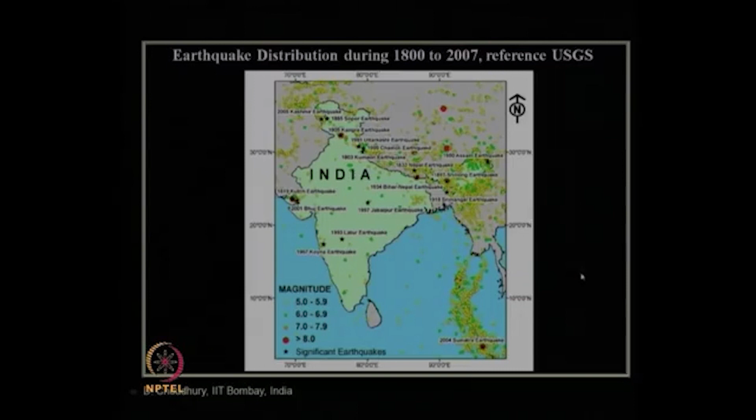As per various seismic zones of India, typical values of PGA, peak ground acceleration, may be taken as per the revised code: 0.1g, 0.2g, 0.25g and 0.4g for zones 2, 3, 4 and 5 respectively.

With this we have come to the end of our module number 1, Introduction to Geotechnical Earthquake Engineering. Next, let us do a recap of module 2, which we learned in the previous lecture. Let us look at the slide here.

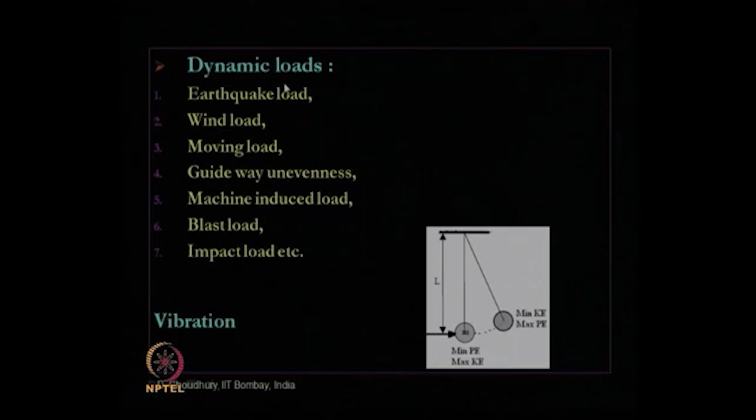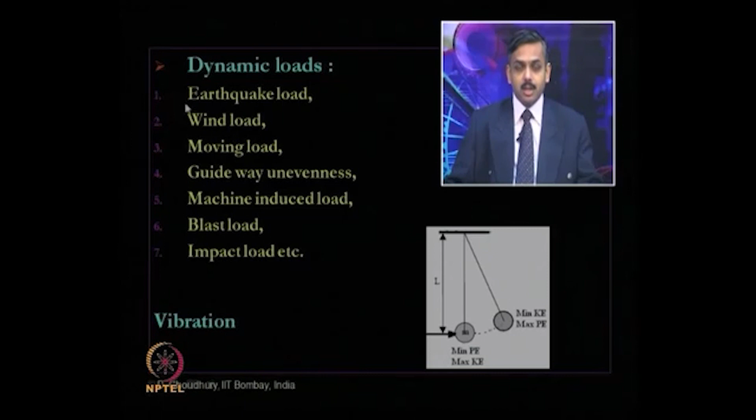What we learned in module 2 is about various types of dynamic loads. A dynamic load has to be time variant, and it should create vibration, that is the exchange of kinetic energy to potential energy and vice versa. These are various types of dynamic loads, and our earthquake load, which we are studying in this course, is one of the major forms of dynamic load.

Then we learned what is known as degrees of freedom. It is nothing but the number of independent coordinates required to define the displaced position of all the masses relative to their original position, which is defined as the degrees of freedom.

We saw the simple example of a simple pendulum, where the degrees of freedom is 1 if it is connected to an inextensible string, but if we change that string to an extensible spring, the degrees of freedom changes to 2. That means we require a minimum of 2 coordinates, theta and r, to define the position of this system at any point of time in space.

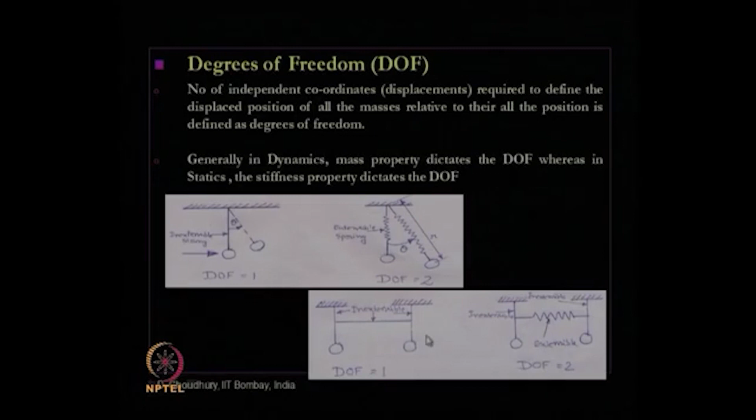Then we saw how we represent a simple vibrating system through a single degree of freedom system. The basic units required to define a simple vibrating system are mass, spring and dashpot or damper, which we call an MSD system. In this MSD system, mass represents kinetic energy, K or spring constant represents potential energy, and the damper or damping constant C represents dissipation or loss of energy.

If there is no loss, we can represent a simple vibrating system using only mass and spring, M and K, but if we want to account for the loss of energy also, it will be M, K and C. This is the picture of a simple vibrating system, a single degree of freedom system, with mass, spring and damper. Its degree of freedom is single, that is u, which at any point of time defines its position, and the applied dynamic load externally on the system is P of t, a function of t.

Taking the free body diagram of this mass, the weight mg acts downwards, and there is a reaction from the rollers on this friction-free surface that balances this static weight. So the static equilibrium of the system is maintained that way.

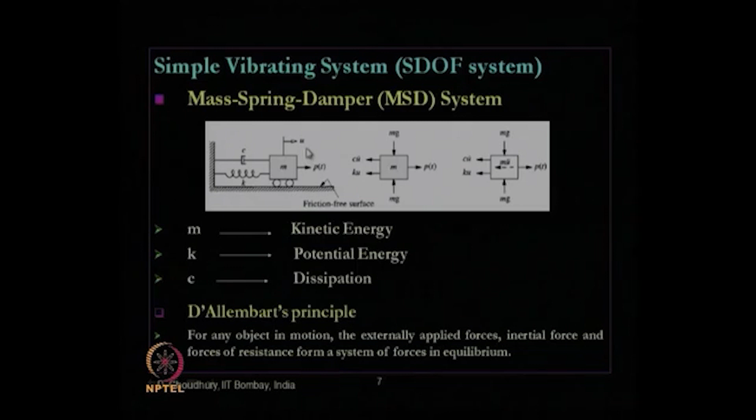Similarly, for the spring force we have to take the relative displacement. Another resistance force comes into picture, mu double dot, which is called the inertia force. That inertia force is nothing but mass times acceleration, where acceleration is d2u by dt squared, the second derivative of displacement with respect to time.

Using that, if we consider a linear model for the equation of motion, mass times acceleration is the inertia force, damping constant times velocity is the damper force, and spring constant times displacement is the spring force, which together equal the externally applied dynamic load P of t.

This is called a linear model because mass is assumed constant, not changing with time; damping constant remains constant; and spring constant is also constant. This is for linear spring, linear damper, and constant mass system. This is the governing equation of motion for a linear model, written in another notation as mu double dot plus cu dot plus ku equals P of t.

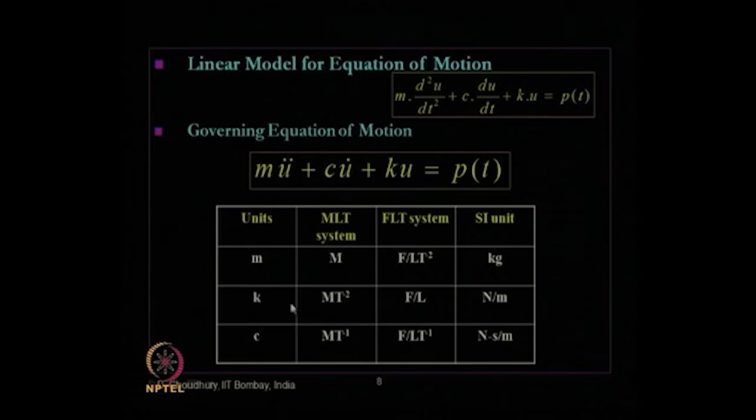These are the various units commonly used for m, k and c. Mostly in SI units we use kg for mass, Newton per meter for spring constant, and Newton second per meter for damping constant.

In our previous lecture we had seen the various types of vibrations. We classified vibration into two major categories: free and forced vibration. Free vibration is when there is no externally applied dynamic load acting on the system, that is P of t is 0, but forced vibration is when that is non-zero.

Within free vibration we had two categories: undamped free vibration and damped free vibration. Undamped means the damping constant is 0, so there is no loss of energy, and damped means the damping constant is non-zero, so there is loss of energy. Similarly, forced vibration can be undamped or damped depending on whether C is 0 or non-zero. Another subclassification of forced vibration is aperiodic and periodic.

Periodic means the applied dynamic load repeats with time, whereas aperiodic means it does not repeat with time. An example of periodic loading is harmonic loading, any sinusoidal or cosinusoidal loading, which can be considered periodic forced vibration.

When the load is not repeating with time, that is aperiodic, we can have two sub-classifications: transient aperiodic forced vibration and steady state aperiodic forced vibration. Transient means the externally applied dynamic load acts only for a finite duration.

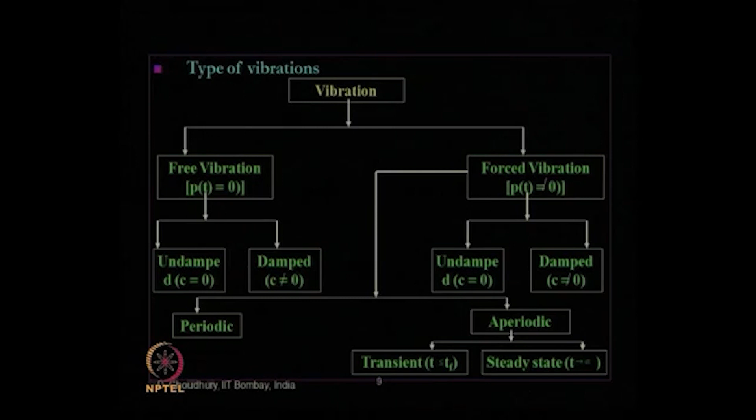Then we have seen the solution for the simplest case of free vibration with undamped condition, where the equation of motion boils down to mu double dot plus ku equals 0. We should know the initial conditions, that is at time t equals 0, what is the displacement and what is the velocity, to get the complete solution for this free vibration.

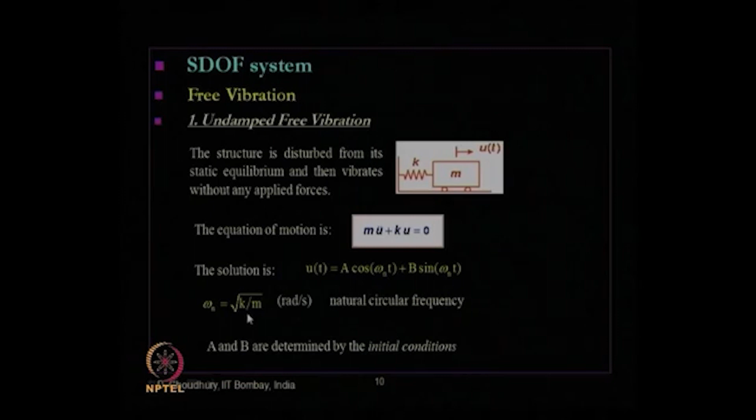The solution of this equation takes a certain form, where the constants a and b need to be obtained from the known initial conditions, and at least one of them must be non-zero. This omega n is called the natural circular frequency, represented by root over k by m.

Then we have seen how to model the earthquake excitation as a forced vibration. This is the basic model, where inertia force, damper force and spring force equals zero, where inertia force acts on the total displacement, because the acceleration acts on this mass for the total displacement, but damper and spring force acts for the relative displacement compared to this ground and total displacement. The difference between that will give us the relative displacement.

By simplification we got the basic equation of motion for earthquake excitation like this: m u double dot plus c u dot plus k u equals minus m ug double dot of t. So ug double dot is nothing but the ground acceleration due to earthquake, and that force gives us the dynamic force due to earthquake, whereas u is nothing but the relative displacement between ground and the top level where mass is concentrated.

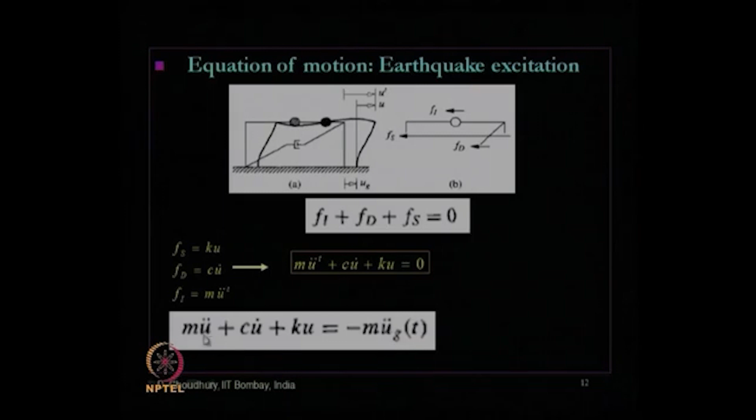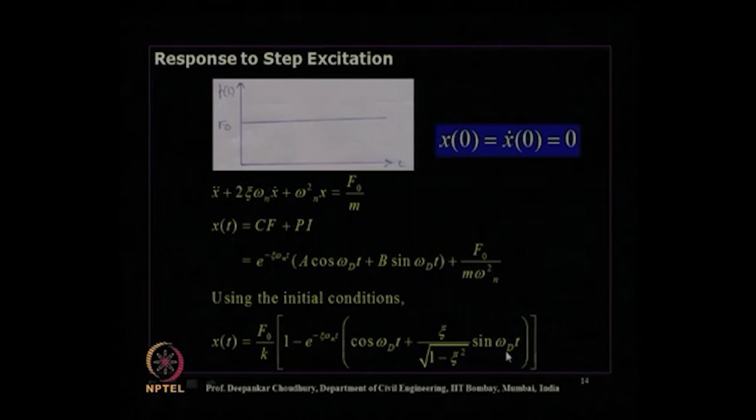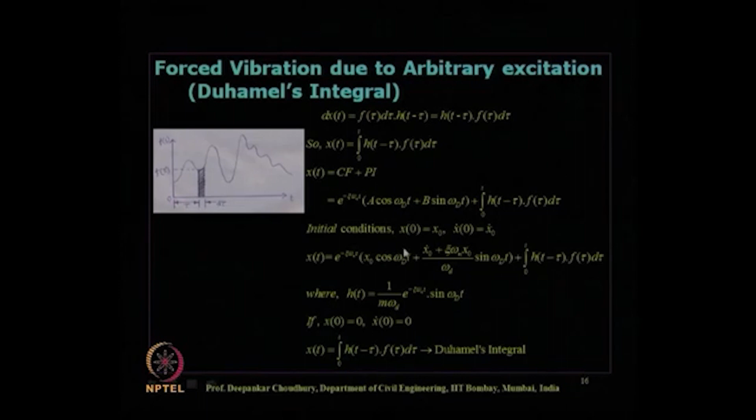Then we had also seen the forced vibration response to step excitation like this, and the complete solution of that equation we have discussed in our previous lecture. Then for any arbitrary excitation, such as any random motion like earthquake motion, we can take a small infinitesimal portion and use Duhamel's integral to find out the particular integral part, while the complementary function part can be obtained by putting x equals to 0 in this basic equation.

So we can now do a simple example problem on this topic of basics of vibration. Let us look at the problem over here.

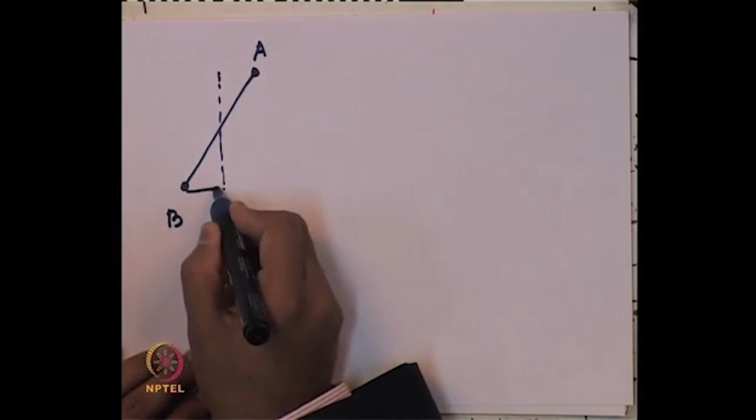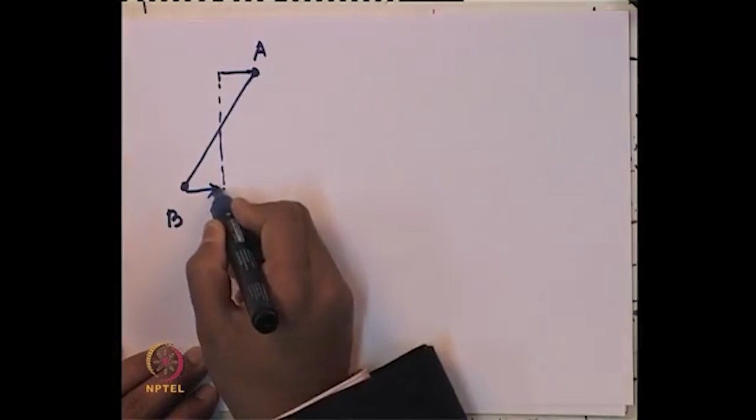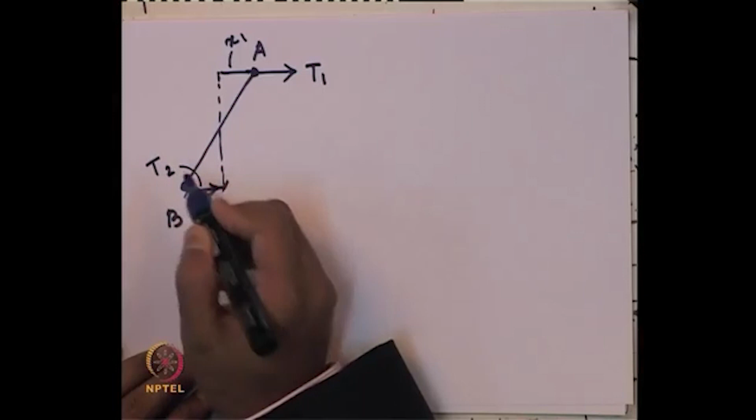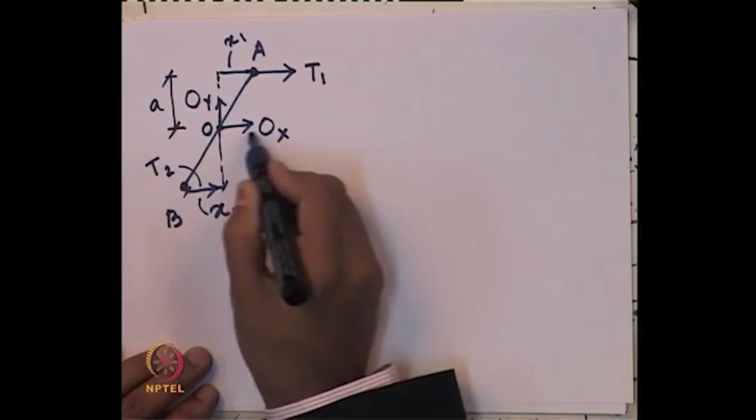So let us see what will be the solution if we draw the free body diagram of this link. The link which is shown over here, link AB, we are drawing the free body diagram. This is moving by x2, this is moving by x1. So this distance is x2, this distance is x1, and corresponding forces are, let us say this is T1, let us say this is T2. We have hinge over here at O, where we can have reactions in the hinge OX and OY in these two directions, and these dimensions are given as A and this distance is given as B.

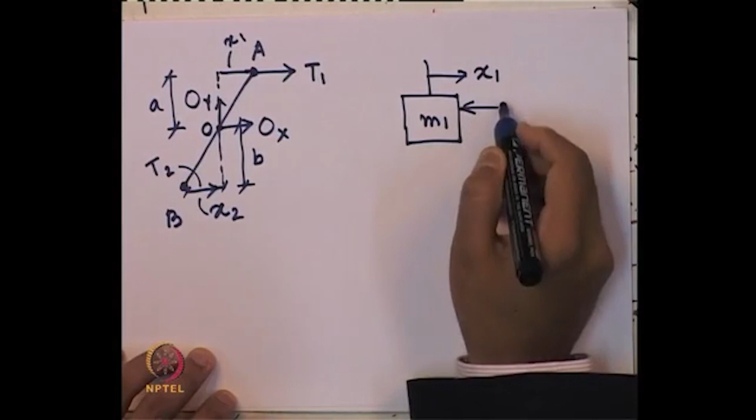So if we draw the free body diagram of the masses, how will it look like? For M1 we have x1, so force will be K1 x1. Let me draw the damper force also for completeness, C1 x1 dot, and we have this inertia force M1 x1 double dot, and the force in this link is T1. This T1 balances through that link. So this is the free body diagram of M1. This is the free body diagram of link AB.

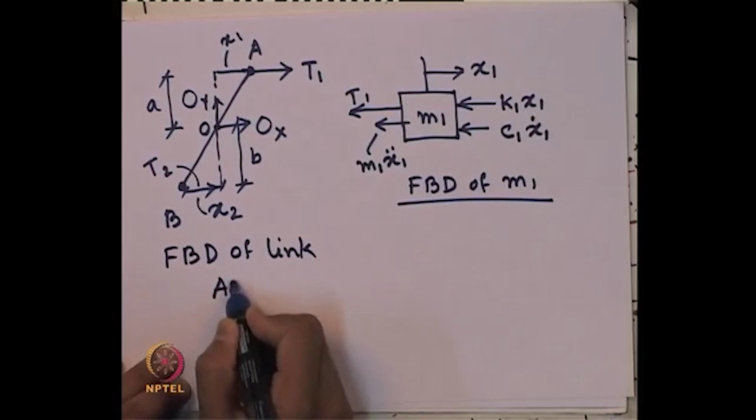And for mass M2 we will have K2 x2, C2 x2 dot, this is the direction of x2, this one is T2. So this direction T2 and this direction T2 balances through that link, and this one is M2 x2 double dot, the inertia force. So this is the free body diagram of M2.

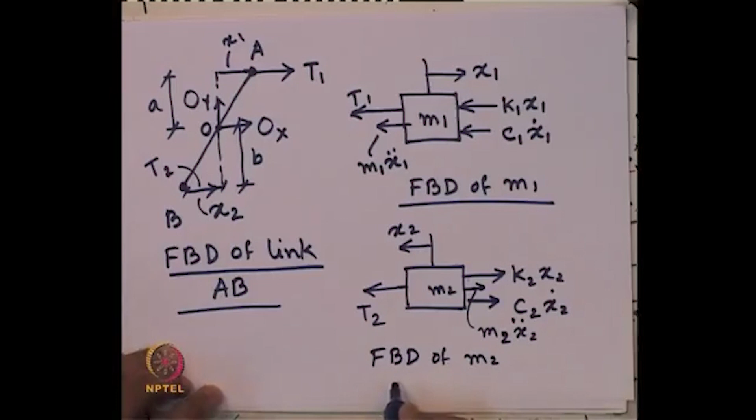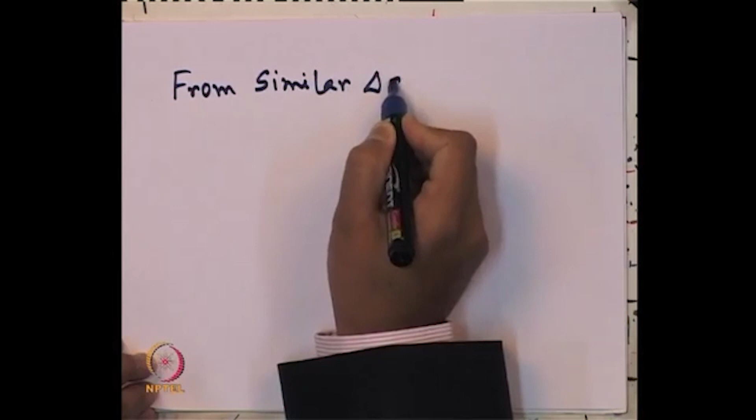Now considering these similar triangles, from the free body diagram of link AB, what can we write? From similar triangles, we can write x1 by A equals x2 by B. Let us say this is equation number 1. We can have a look over here.

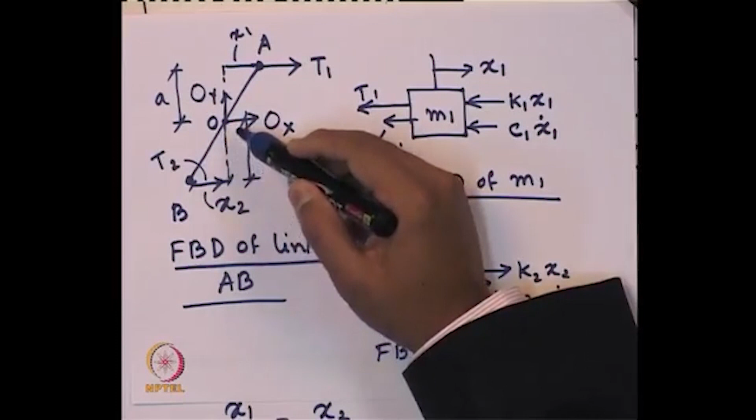See, this is A, this is our x1. So, x1 by A equals to x2 by B. So, that is what is shown over here.

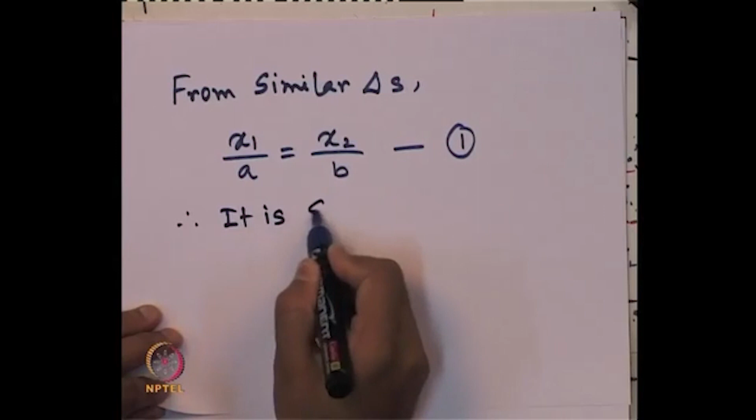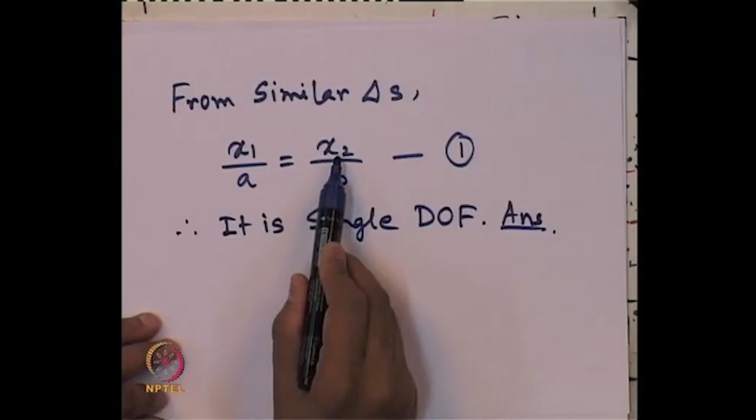Therefore, what we can say about degrees of freedom? It is single degree of freedom. This is the answer of the first part of the question. Why? Because x1 and x2 are not independent, they are dependent on each other. That means the entire system, x1 and x2, are correlated. So, the number of independent coordinates is either of them. Hence, the entire system is having a single degree of freedom system. So, that is the answer of the first part.

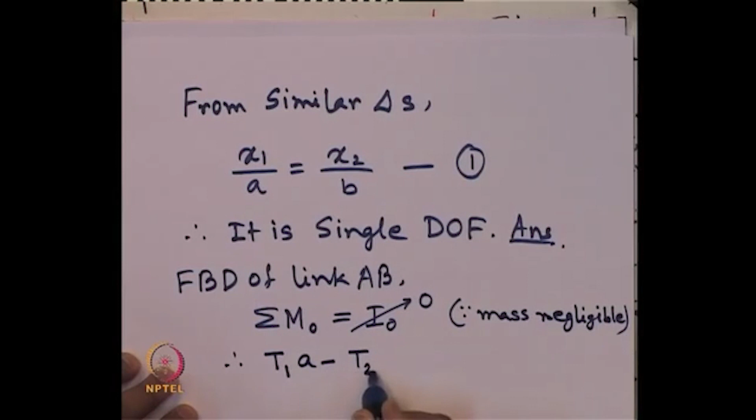Now, from FBD of link AB, we can get, if we take sum of moment about that hinge point, equals to I naught, which is 0 because mass of that link is negligible. Otherwise, some inertia component will come. Therefore, we can write T1 times A minus T2 times B equals to 0. So, this is our second equation.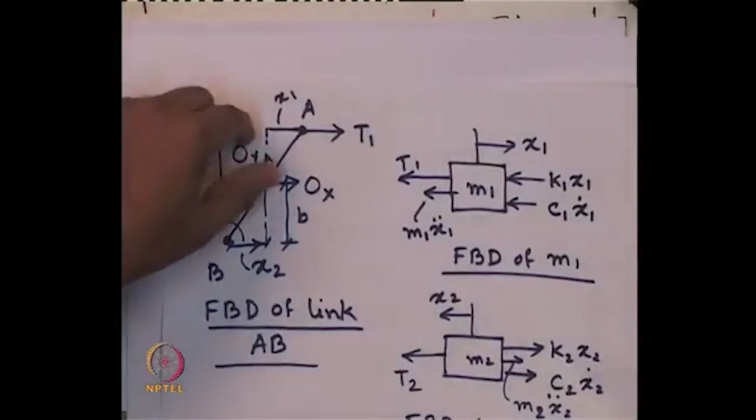If we look at here, we are taking moment about this point. So, T1 times A plus T2 times B, T1 times A minus T2 times B equals to 0. So, with that, now from the free body diagram of...

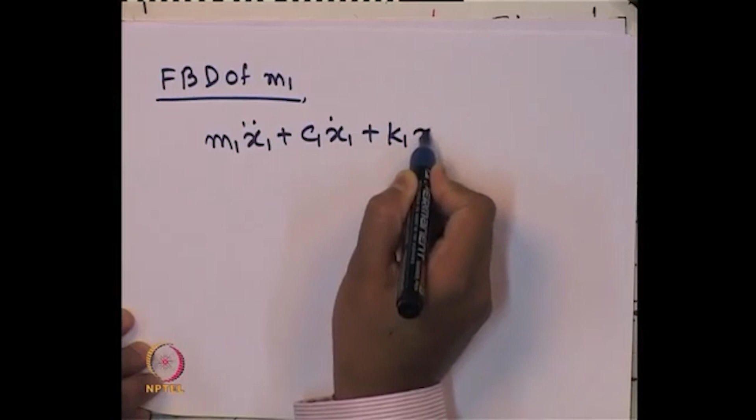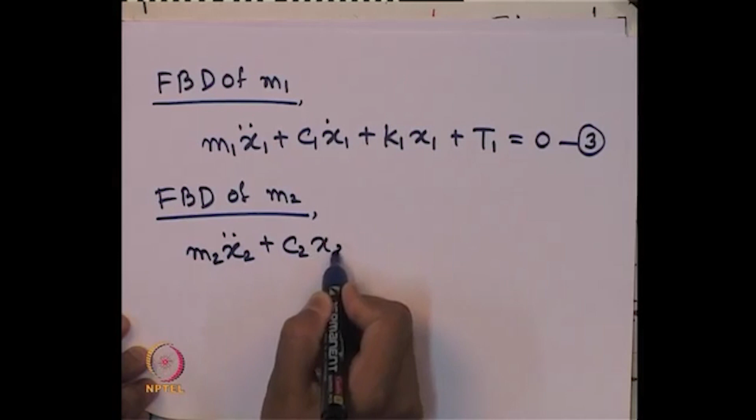So now using FBD of M1, what we can write? That M1 x1 double dot plus C1 x1 dot plus K1 x1 plus T1 equals to 0. This is say equation 3, and from FBD of mass M2, we can write M2 x2 double dot plus C2 x2 dot plus K2 x2 minus T2 equals to 0. This is equation 4.

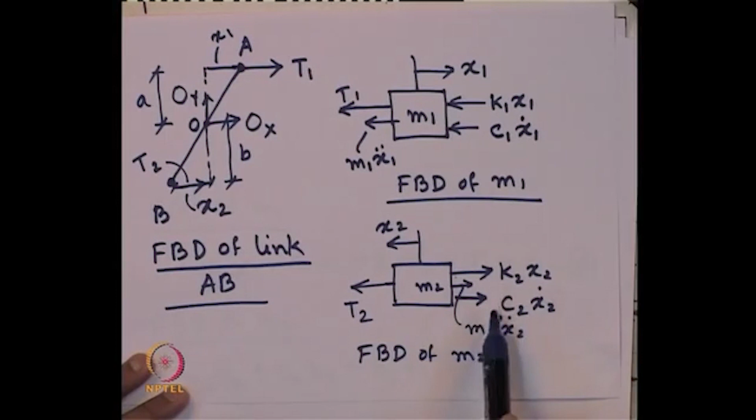Let us look here. So, M1 x1 double dot plus C1 x1 dot plus K1 x1 plus T1 equals to 0, and here M2 x2 double dot plus C2 x2 dot plus K2 x2 minus T2 equals to 0. That is what we had written through these equations.

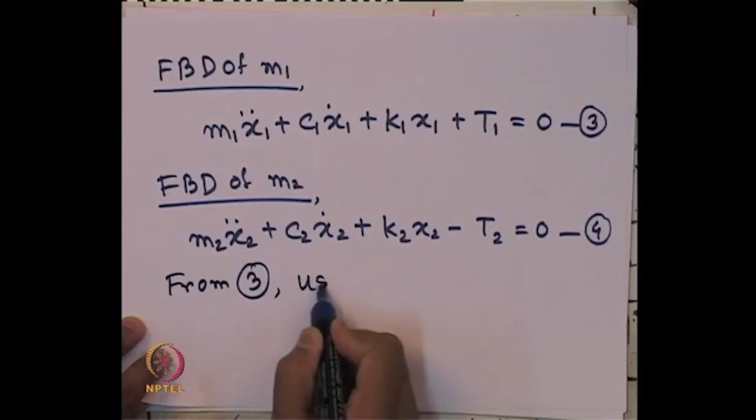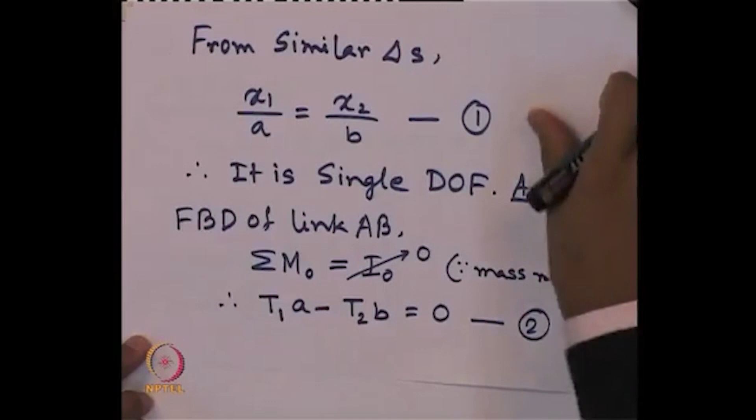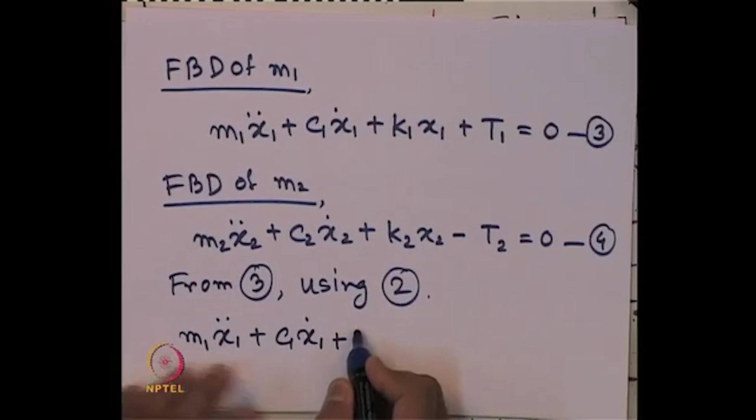Now, from this equation 3, using our equation 2, that means the relationship between T1A and T2B, what we can write? That M1 x1 double dot plus C1 x1 dot plus K1 x1 plus T2 times B by A equals to 0. That can be equation 5. Why? Because this T1 is nothing but T2B by A. So, that is what I have written, T1 as T2B by A.

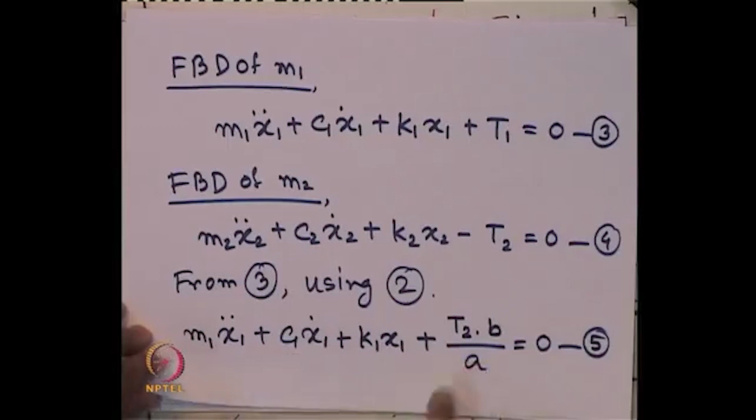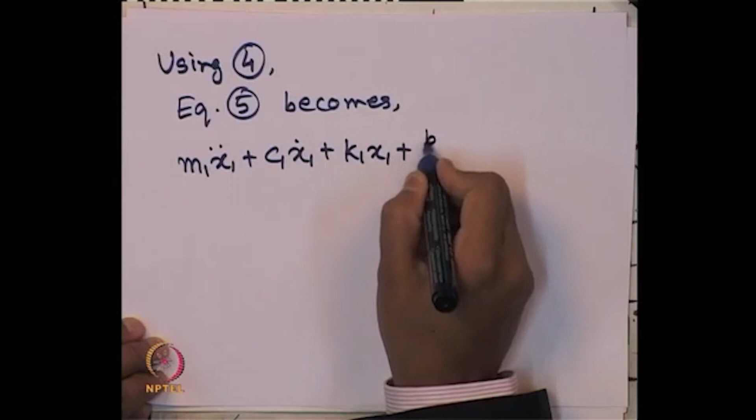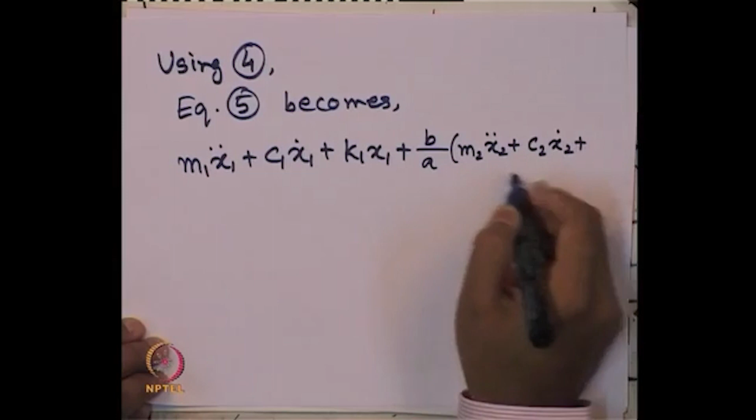So, using now equation 4 and 5, solving these two equations, what we can write? Using 4, equation 5 becomes M1 x1 double dot plus C1 x1 dot plus K1 x1 plus B by A times M2 x2 double dot plus C2 x2 dot plus K2 x2, this equals to 0.

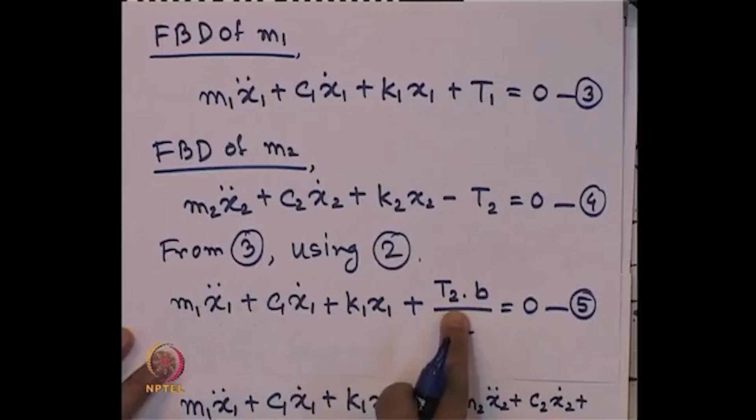How did we get this? Look at here. So, this equation 4, that T2 equals to this, that we are putting in equation 5. So, that is why we got this B by A times T2, which is this part. Hence, it becomes like this.

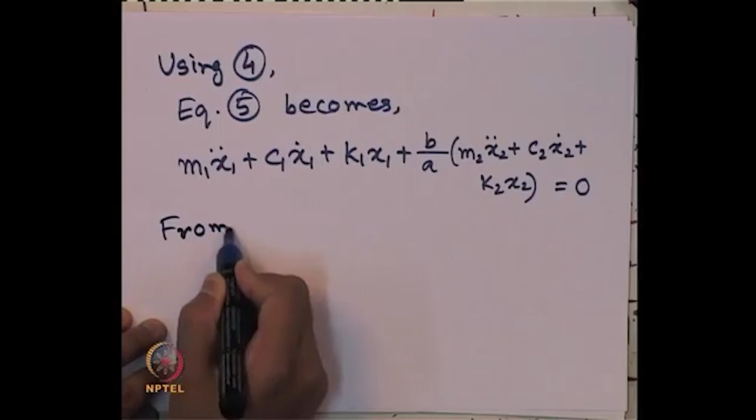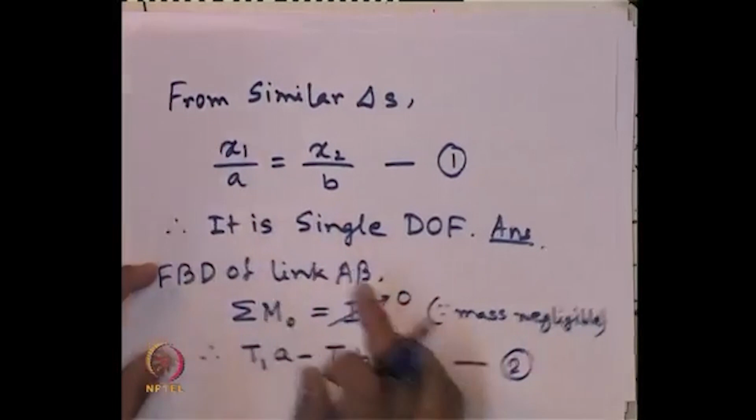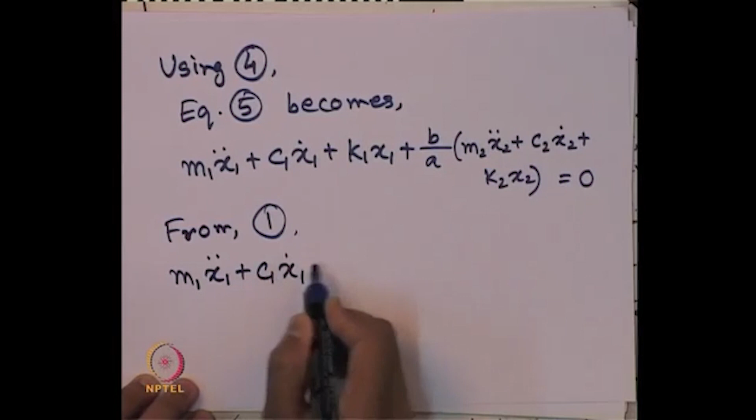Now, from equation 1, let us use what we can get from 1. From 1, we have a relationship between x1 and x2 through this A and B. So, if we use that, what we can write: m1 x1 double dot plus c1 x1 dot plus k1 x1 plus b by a into another b by a, m2 x1 double dot plus c2 x1 dot plus k2 x1...

This will be x1, because we have now used equation 1. So, k2 x1 equals to 0. So, we have to be taking equation 1. Why? Let us go back again to equation 1. This x2 is nothing but b by a times x1, that is what I am using here. X2 equals to b by a times x1, that is why b by a, another b by a came out, and this becomes x1.

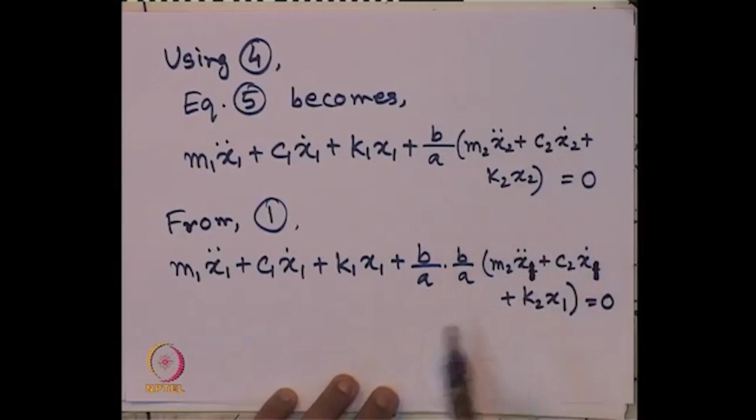Hence, on simplification, we can write this equation as m1 plus b square by a square times m2, times x1 double dot, plus c1 plus b square by a square times c2, times x1 dot, plus k1 plus b square by a square times k2, times x1, equals to 0. So, let us say this is equation 6. So, you can see everything is represented in terms of a single degree of freedom, which is x1 we have taken in this case.

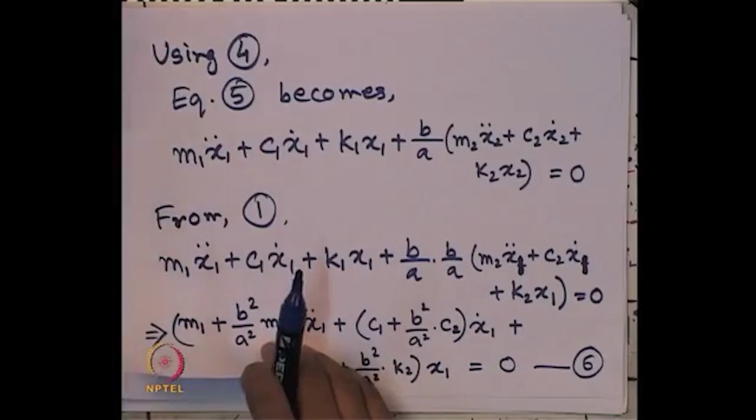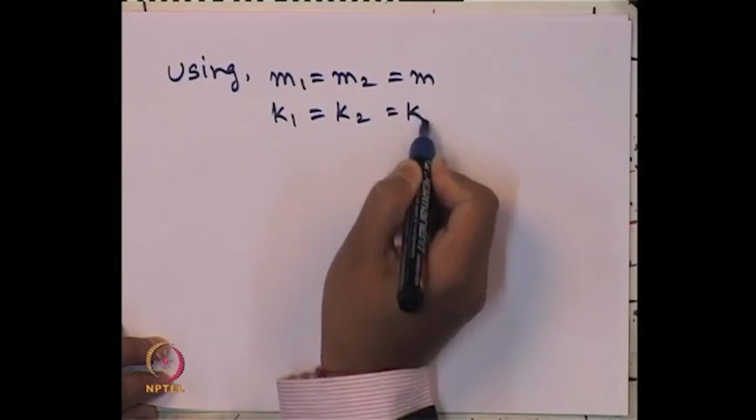So, now what can we write further? Now, what is the given condition? Using m1 equals to m2 equals to m, that is what is given to us, k1 equals to k2 equals to k, and c1 equals to c2 equals to c.

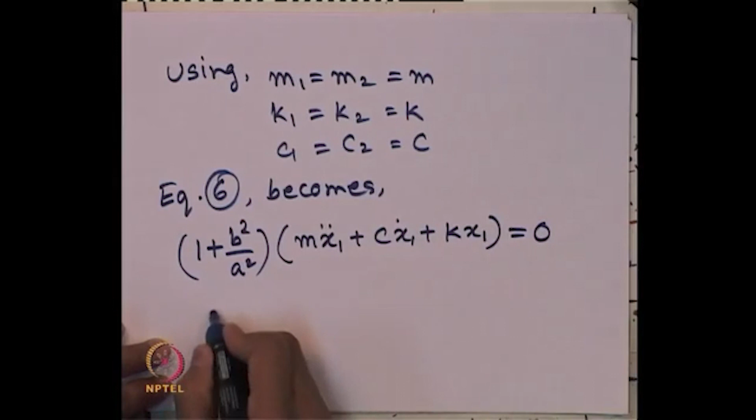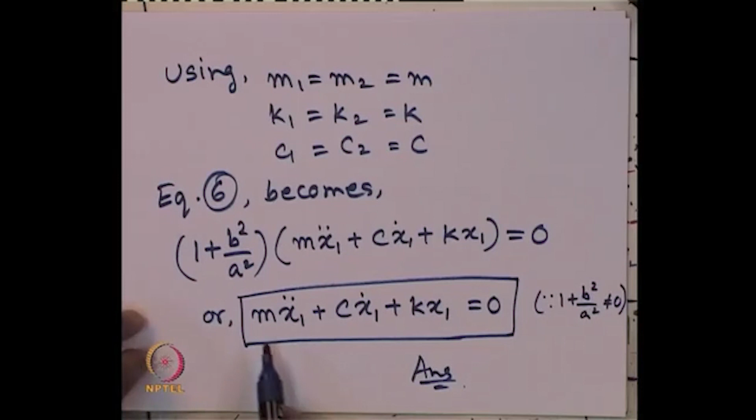Using this, equation 6 becomes: 1 plus b square by a square, we can take common, that becomes m x1 double dot plus c x1 dot plus k x1 equals to 0. So this is our governing equation of motion, that is the second part of the answer, because this 1 plus b square by a square term is never 0.

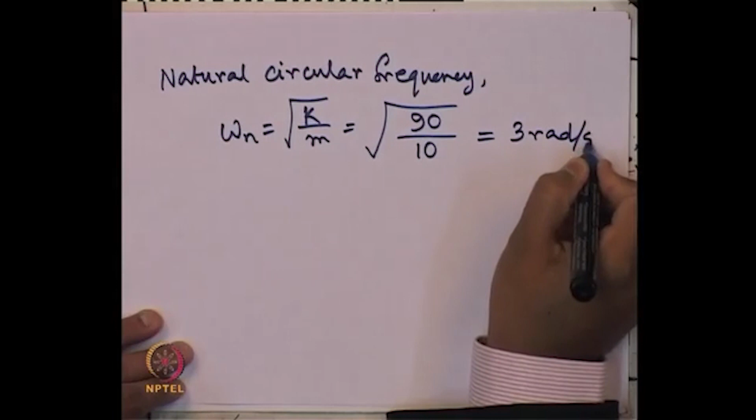Now let us calculate the values whatever has been asked in this question. We have to find out natural circular frequency, which is omega n, nothing but root over k by m. What are the values of k given? That is 90, m is 10 kg, which comes out to be 3 radian per second. That is the another answer.

What is asked? Calculate the natural frequency. And what is natural period? So natural period is T n, which is 2 pi by omega n, which will be, after putting this value of omega n here, about 2.1 second. So this is the answer of another part.

Let us look here what was asked in the question. Calculate the natural frequency. Natural circular frequency is 3 radian per second, and natural period of vibration is 2.1 seconds. So if somebody is interested to calculate, they can calculate f n in terms of hertz also, that will be 1 by 2.1. So therefore f n, natural frequency, will be equals to 1 by T n, that is 0.478 hertz.

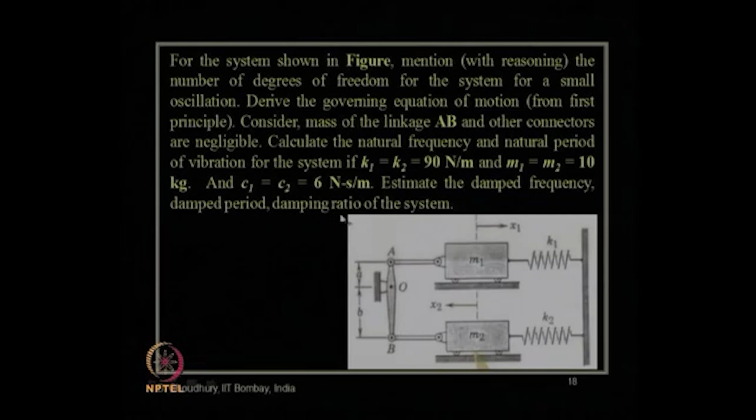Next, it is asked, let us see here what is asked. Estimate the damped frequency, damped period and damping ratio. So to find out these things, we need to compute first critical damping. Critical damping C c is nothing but 2 m omega n, which is 2 into m is 10 kg, omega n we obtained 3 radian per second. So, so much Newton second per meter unit, so 60 Newton second per meter.

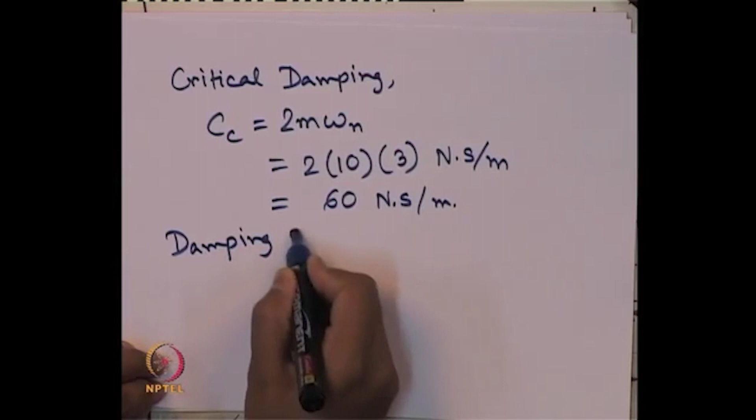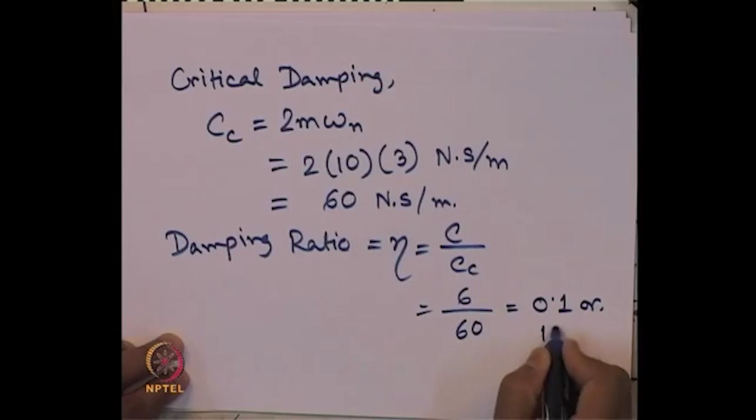So damping ratio is nothing but eta, let us say C by C c. How much is C given? 6, and how much C c we computed? 60. So it comes out to be 0.1, or if we represent in percent, it is 10%, damping ratio is 10%.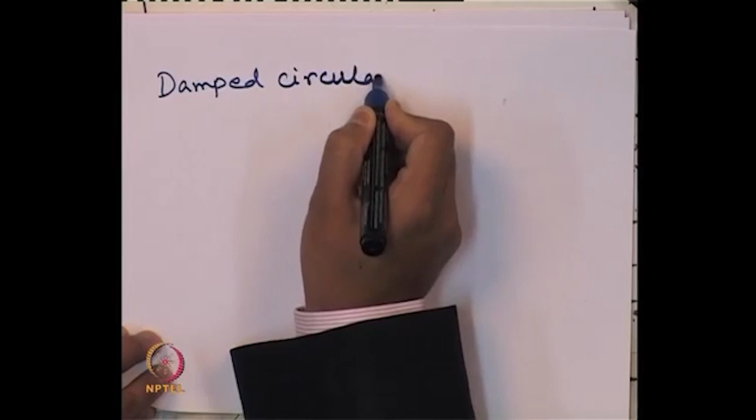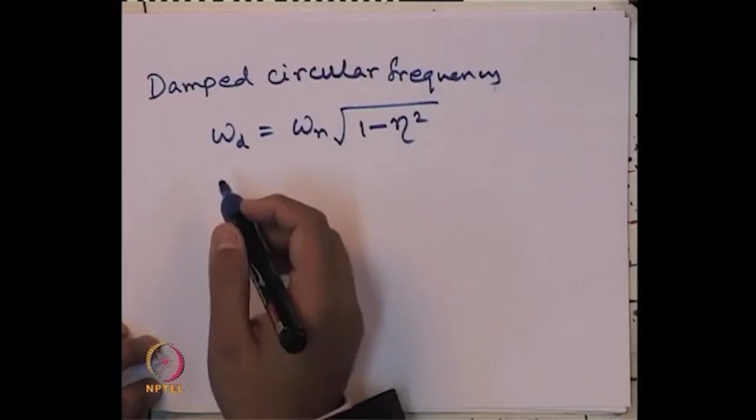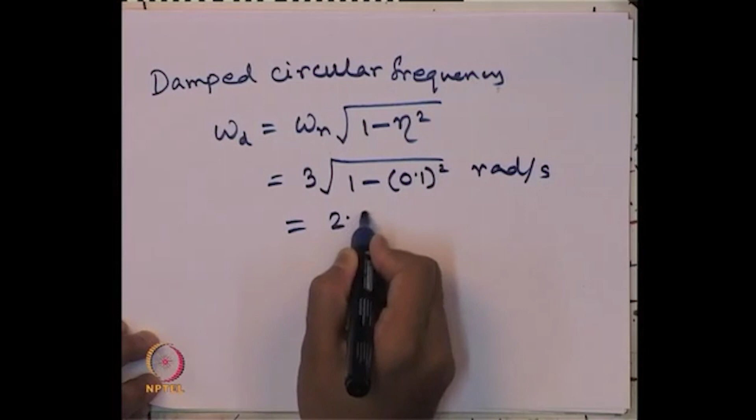And what is the damped period? Let us first find out damped circular frequency, omega d, which is omega n, natural circular frequency, times 1 minus eta square. Why this one? Because it is underdamped, since damping ratio is less than 1, which will be 3 into root over 1 minus 0.1 whole square, so much radian per second. It will be 2.985 radian per second.

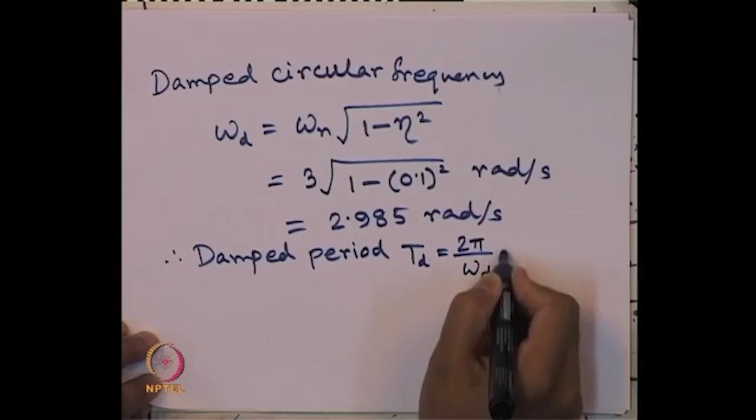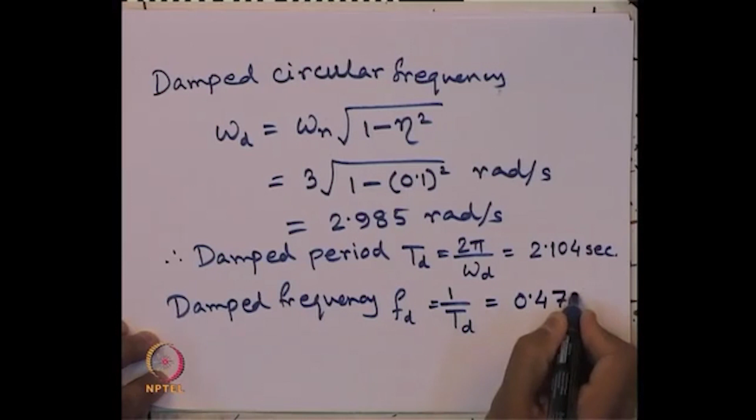Therefore damped period will be T d equals to 2 pi by this omega d. If we put this value over here, we will get 2.104 second, and therefore damped frequency will be f d is 1 by T d. Putting this value, we will get 0.475 hertz. So that is the answer of the total problem.

Okay, so with this recap and this problem which we have solved completely, we end module number 2. Let us start our next module for this course on geotechnical earthquake engineering, which is module 3. In this module 3, we will be discussing the topic of engineering seismology.

Let us learn what is engineering seismology. The definition says seismology is that branch of geophysics which is concerned with the study and analysis of earthquakes and the science of energy propagation through earth's crust. So that is called seismology, which is a branch or subdivision of geophysics. Whereas engineering seismology is concerned with the solution of engineering problems connected with earthquakes.

So seismology is extremely important. Why? Because the study of earthquakes gives us important clues about the earth's interior, and understanding earthquakes will allow us to minimize its damage and loss of life. That is the reason we should learn seismology, and in particular engineering seismology, so that we can provide a better solution to handle earthquake related damages, to reduce or stop the loss of life and property.

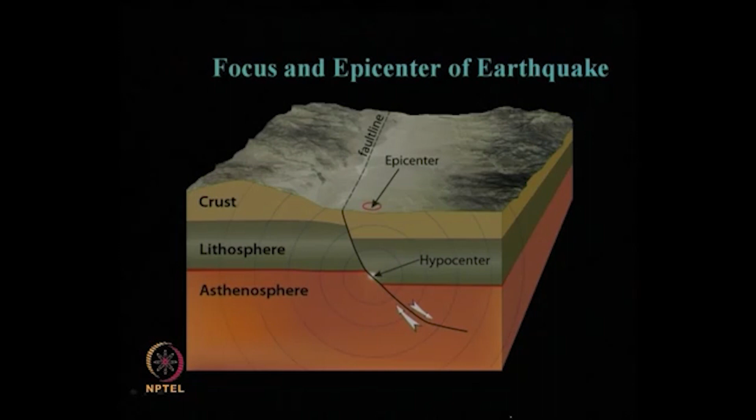Let us see the next terms, which are focus and epicenter of earthquake. What is this basic terminology? The point where that release of energy occurs inside the earth's crust is called the focus of the earthquake. The other name for that focus is hypocenter of the earthquake - hypocenter and focus are the same term. From that hypocenter, if you project it vertically on the ground surface, the point where it meets the ground surface is called the epicenter of the earthquake.

So what does it mean? Epicenter always has to be on the ground surface. It does not mean it is the point where earthquake energy gets released - it is the point which is nothing but the vertical projection of the energy release point of the earthquake on the ground. From this point energy gets released, and then seismic waves travel in all directions, and if you project it vertically, that will give you the epicenter.

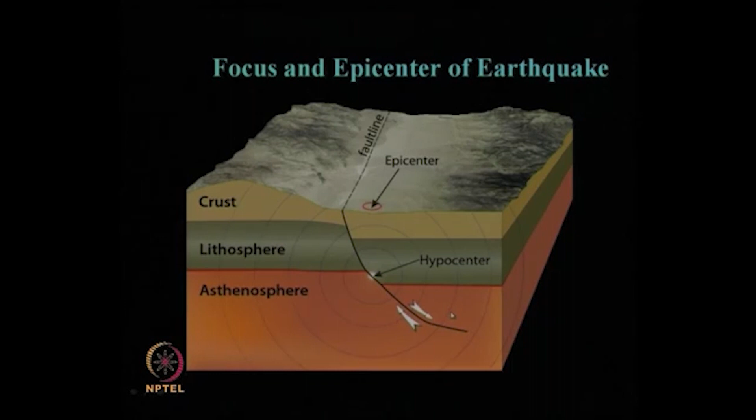Now, you can of course ask me, since the earth is like this, you can take vertical projections in all directions, because it is a kind of circular arc shape. From one point inside the circle, you can have several projections, but whichever projection on the ground surface gives you the least distance, that signifies your epicenter. So the least vertically projected point on the ground will give us the location of the epicenter of an earthquake on the ground surface.

Now, if we want to see what are the basic reasons for an earthquake - what causes an earthquake? There are two basic causes of earthquake. One can be called movement of the tectonic plates, and another can be called rupture of rocks along a fault. So, movement of tectonic plates - what occurs here?

Like earth, it is divided into various sections or plates, called tectonic plates, and these tectonic plates float on the fluid-like interior of the earth. As we know, earth has three major portions: the core, the mantle, and the crust. These crustal plates typically move on this fluid-like interior, and earthquakes are usually caused by sudden movements of these plates. When these tectonic plates move suddenly with respect to each other, that causes an earthquake, called a plate tectonic earthquake.

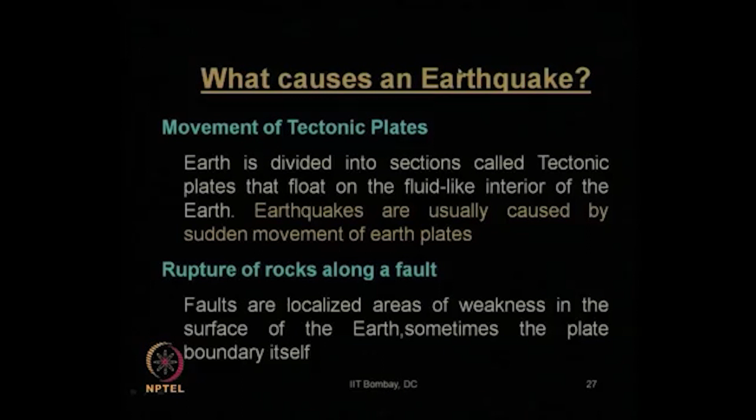Another cause of earthquake can be a rupture of rocks along a fault. Faults are localized areas of weakness in the surface of the earth. Within the tectonic plates, wherever there is weakness in the rock of the earth's crust, those are called faults. Sometimes the plate boundary itself can be considered a fault, because that is a weak point where energy inside the earth can get released. So whenever there is a rupture, when the rock breaks along this weak point, those are called fault related earthquakes.

So these are the two major causes of earthquake.

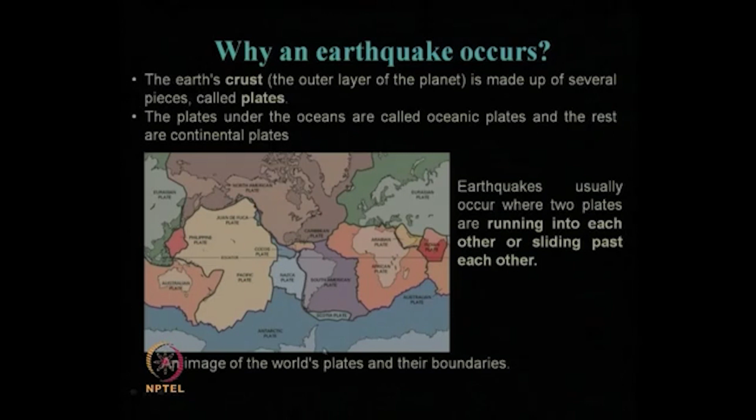This image shows the world's plates and their corresponding typical boundaries. The entire world map is now placed in two dimensions, so this part continues to that portion. This is the Eurasian plate, Europe plus Asia. This continues over here to the Indian plate, and this part is the Australian plate. Now, South American plate, Caribbean plate, Nazca plate, Arabian plate, African plate, North American plate, Juan de Fuca plate, Philippine plate, Cocos plate, Pacific plate, Antarctic plate, and Scotia plate. These are the various major plates all over the world and their plate boundaries.

Now, where does an earthquake occur? We have already seen what causes an earthquake - there are two major causes: one is plate tectonic earthquake, another is fault rupture earthquake. So these are the two causes, and now let's see where earthquakes occur.

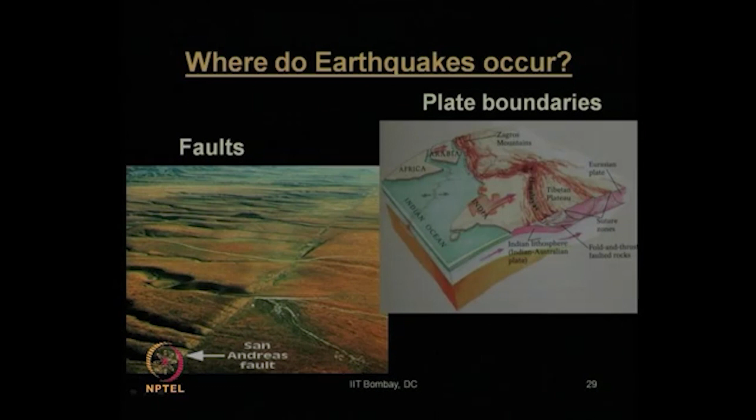Whereas if we talk about the fault rupture earthquake, another type of earthquake, a classic example is the San Andreas fault, located in California state of USA. Along that fault, since a fault is already a location of weakness in the earth's crust, when energy tries to get released, it prefers this fault location from where the earthquake energy gets released. That is why along this fault, number of earthquakes can occur again and again.

So on the ground, whatever fault we see, like the San Andreas fault, it does not mean the fault location is limited within this length and only a few meters of depth or area. It can extend in any direction. So geologists or seismologists generally give us the length of the fault, depth of the fault, and the cross sectional area of the fault as fault characteristics or fault database information, which are necessary, because otherwise, if you assume the fault is in the wrong direction or depth, your calculation of fault characteristics will go wrong.

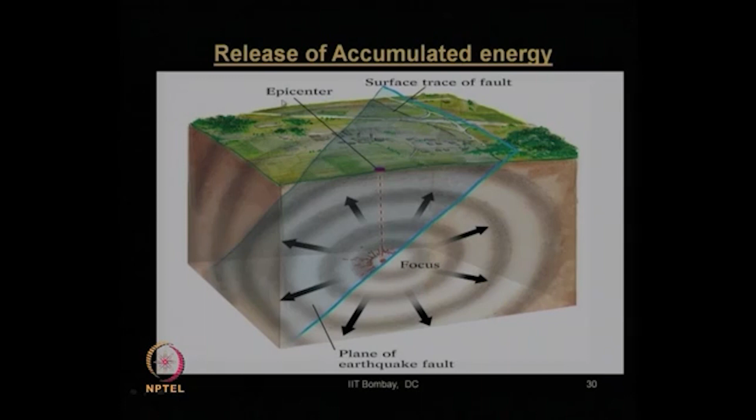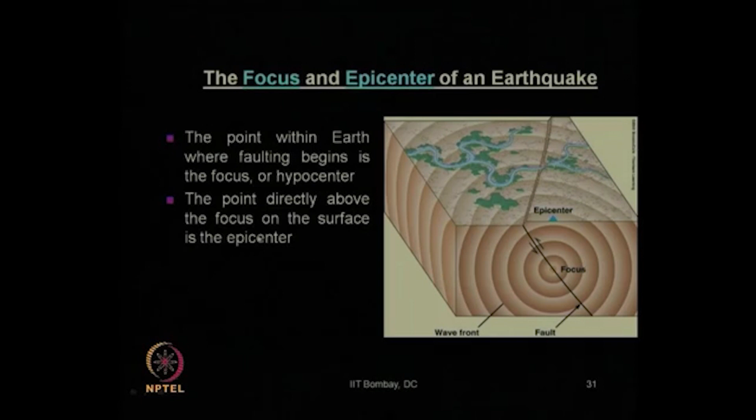So from this focus, as I said earlier, if you draw a vertical projection onto the ground surface, wherever it meets, that point is called the epicenter of the earthquake. This picture shows the focus and epicenter of the earthquake - this is the focus, this is the fault, these are seismic wave fronts, and the vertical projection on the ground will be the epicenter. The point within the earth where faulting begins is called the focus or hypocenter, and the point directly above the focus on the surface is called the epicenter.